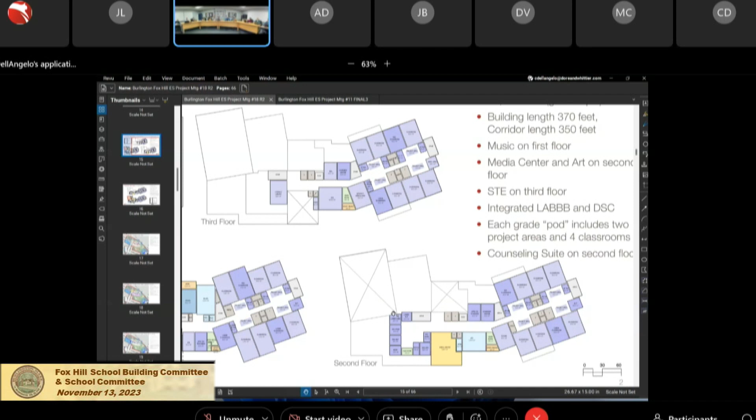And then you'll see the classroom wing or academic spaces, again 4 classrooms per grade. When you go up to the 3rd floor, it's primarily academic spaces. The science, tech, engineering classroom is up on the 3rd floor as it supports grades 3, 4, and 5. We have the counseling suite, whether it's guidance, adjustment counselors, psychologists, centrally located on the 2nd floor, so they have easy access to all 3 floors. So when we look at the 2nd floor plan...

So the 2-story option is very similarly laid out. The difference is that there are 3 grades per floor. So on the 1st floor, you'll enter, the cafeteria would be in front of you, the gymnasium slightly to the left or west of that. We have the cafeteria with the stage attached and the music classroom adjacent to that. And then you'd be entering the academic wing, and you'll see again, similarly, the 4 classroom pods per grade. We'd have kindergarten, first, second on the first floor, and then third, fourth, fifth on the second floor.

When you go up to the second floor, we again have the media center centrally and prominently located with the science, tech, engineering, and the art room. That's a great opportunity for shared resources and working collaboratively between the 2 spaces. The counseling suite would be on the second floor and have easy, direct access to the main administration down below.

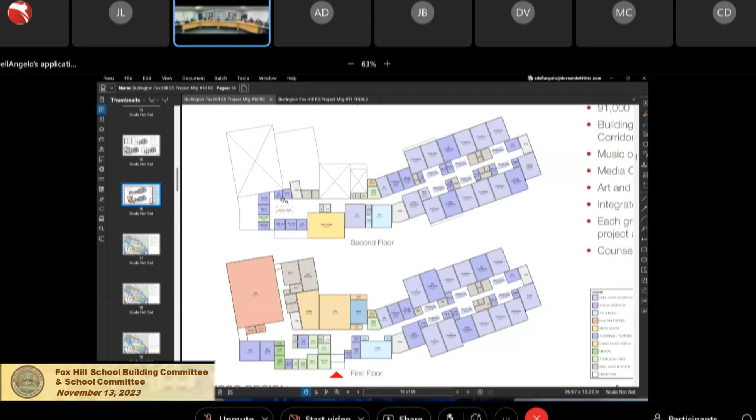I think that's it, if you want to. Yeah, I'm trying to see them.

Thanks, that's okay. So this footprint is slightly larger, it's 53,000 feet, and obviously the gross square footage is the same. The building length is slightly larger at 470 feet, with a corridor length again slightly larger. And then the music is on the first floor, the media is on the second, along with the art and the STE. The organization of the classrooms is exactly the same, with 4 classroom pods with special education programs or other support spaces to allow future flexibility as programs change.

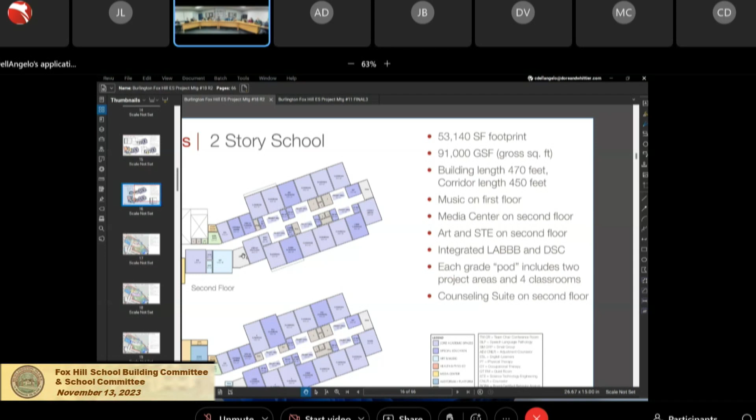So maybe we'll pause here, and if anyone has any questions regarding the organization of the plans as it relates to 2 or 3 story.

So I know we've talked a little bit about where, if we needed to put an addition on in the future, where would that go on the 2-story building, just for the sake of it. And then I know some people were talking about configuration, and if we did the 2-story, trying to make it not as long—is there any other way to lay things out, place things, so that it isn't as long? Like maybe putting the gym right behind the cafeteria, or doing something to rearrange things. But more importantly, just the first question, and then the other.

Thank you. So Christina, if you could just jump to some of the site plans. We have identified locations in all of the options. If you could zoom in, you'll see this is a 3-story option, but you'll see the dotted dash line at the end—depending on the final layout, final configuration, 2 classrooms at the end could be expanded. Do you see that dotted line? You could have 2 classrooms, so in a 3-story school you could get 6 additional classrooms, and in a 2-story school, 4 additional classrooms. This is where we currently are today, but once we have a final location, we can massage it and work on it to see if we can expand it further given the configuration of the location in the wetlands and constraints.

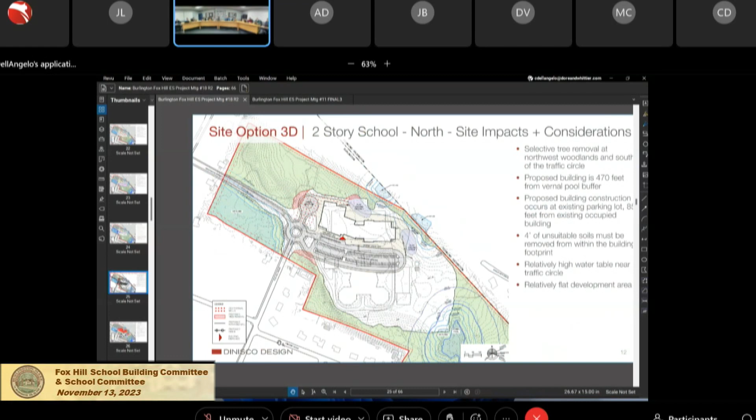Is that too far? I think that's too far. You gotta scroll up, sorry. Keep going. Is that too far? No, it's so hard to not be able to drive. Is this the two, this is the 3-story. All right, so come back down maybe. 29, thank you. I've got my cheat sheet here too. You got it, all right.

So as you can see, we'll continue to play with it, Catherine, how to break up the long mass, but we've already started to push and pull to break down the scale and keep the components—your academic wing you want to keep together. Then we have the core with the music and the cafeteria and then the gym. Each option has similar but different approaches, making sure we're able to get receiving into the building. We don't want them to have to drive all the way into the site or around the building to access it. But this will give you an idea that we're really trying to break down the scale, the massing, and make this a very interesting building as opposed to just a long linear building or approach.

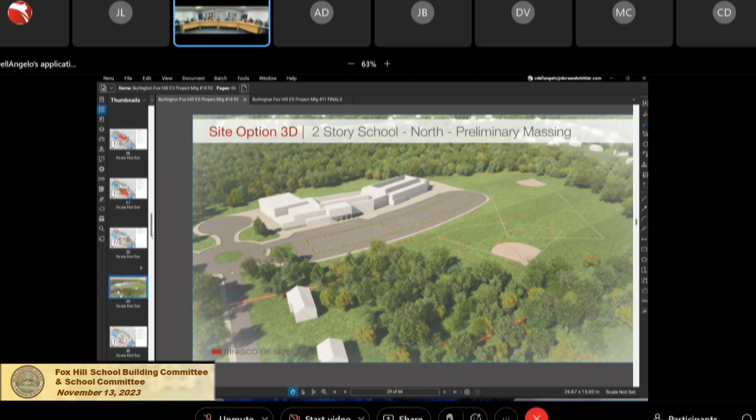And then if we look to the south, just to give you an example of what that might look like, we are slightly limited. This is the 3 stories, so keep going.

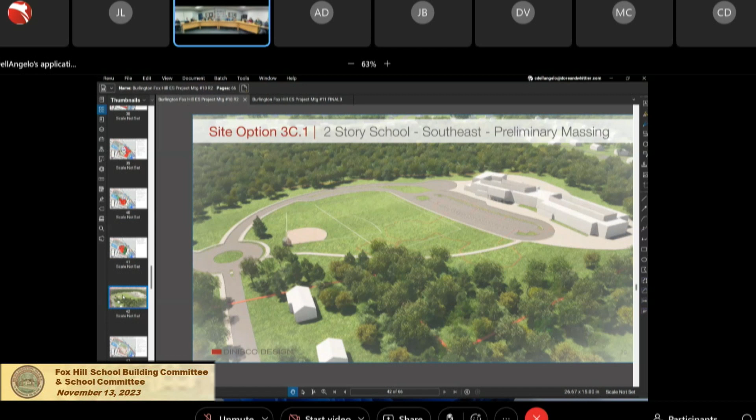There you go. So what slide is that? This is— thank you. Right, so if you want to scoot it over or zoom out just a little bit, yeah.

There you go. Yeah, this is the 3-story. So just so you could see, this is the 2-story—site option 3C, 2-story. We have several options of this, and we're thinking how we can locate the service, the gymnasium, the cafeteria, the drives, et cetera. So we'll continue, depending on what solution people like best, to try to make the building not feel so long and linear.

And we took this view for all of the options so it was the same view and everyone could see them. But clearly, unless you're flying a plane or have a drone, you would never be seeing the building from this view. But it just gives you an idea of the massing as it starts to take shape.

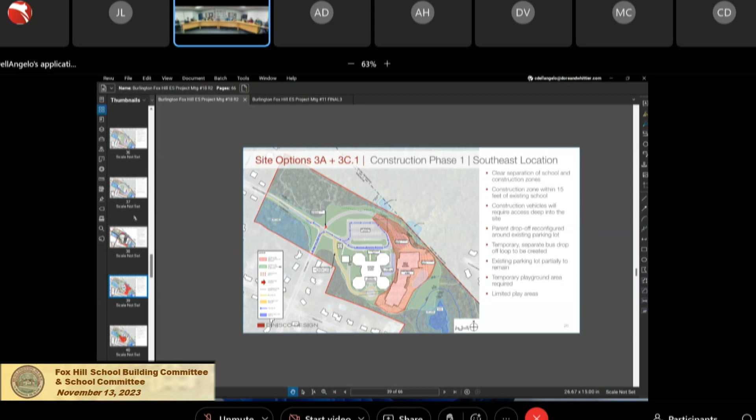And here too, if you would go up maybe 3, 4 slides, you can see where an addition would go if it was to the southeast. Oh yeah, yeah, keep going. Up or down? Up. Slide 30? Back slides, yeah. I'm trying to drive and view all at the same time. That's a 3-story, so it would be—could be even slide 22. That's what I'm on, yeah, right now.

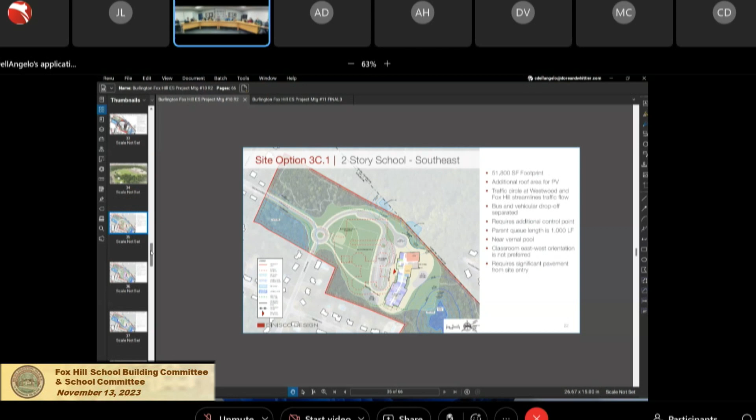Perfect, so if you zoom in—so we have a couple of options for the southeast. You can see we have the gym to the north and the classroom wing to the south. You could see that we can expand the classroom wing here. We're being mindful, we have some constraints, right? We have the vernal pool, the wetlands, the vernal pool buffer to the east, and then to the north we have another wetland, and we're trying to be as respectful as possible with a 100-foot setback there. And then you can see the dotted existing building. So we're somewhat squeezed or pinched as we have to locate the building in between these two constraints. But this is one way of looking at it, right?

With the gym to the north, the classrooms to the south, and then the next option, I think we flip the gym. The dotted line right here, that's for addition—that's the addition space, and that would be the same. Right now we've been able to identify 2 classrooms on the second floor and 2 classrooms on the first floor.

Yeah, if you want to just scroll down maybe, now I've got to look at it—everyone else is my eyes. I love it, thank you. We have the gym flipped in another version. So if you go to slide 32.

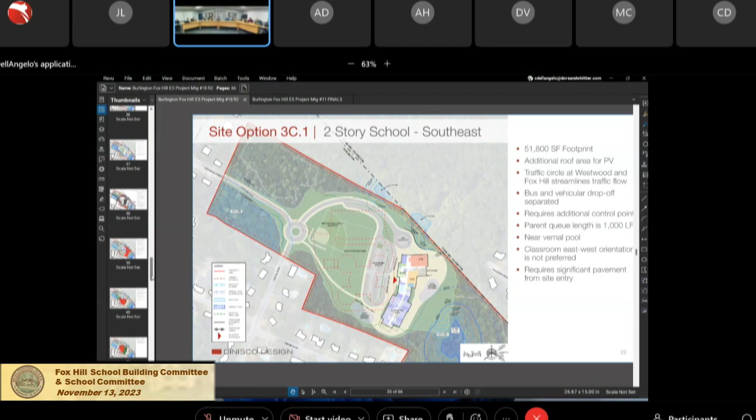Right, that's perfect. You'll see that this is again 2-story, and flipping the gym, you can see the building really starts to kink. We're able to make it a little more interesting and not feel as long or linear, but this is a tight site. With the existing constraints, especially the existing school, we start to become a little bit limited on how the building could be laid out in that location.

Now, with this version, can you flip it so the buses are on the opposite side? So if we flip the bus, you're saying put the buses to the north? Yes, up here, because I don't think anyone on Vincent's going to want buses idling in their backyard at 8 o'clock in the morning.

Agreed. So with that, why don't we walk through that? Christine, if you could go to the slide before that. We've come up with different schemes, and I think what we want to show is when we start thinking about the site relationships, all of the site requirements.

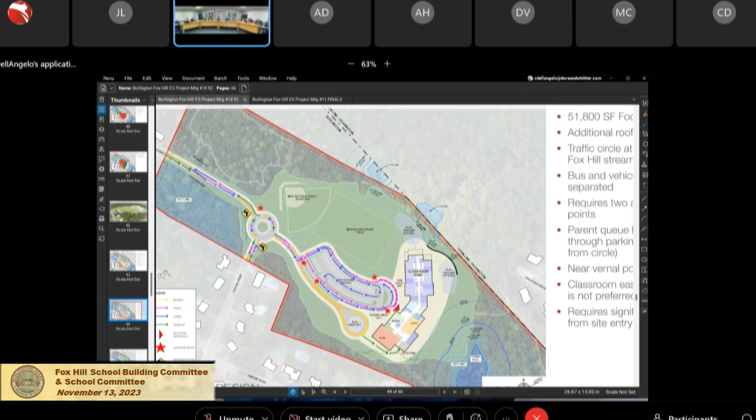If we flip the building so the gymnasium's to the north, then the bus loop would go to the north. I think we have that option - it wasn't shown, but we have one that has both the bus on the north and the parking. So what slide is that? 24. 24, 23, yep.

This is the same, right? You can see what we did here - there are different ways to configure the parking. We want to be thoughtful. We've started thinking about how we can do all of this with the existing building that has to remain, and what makes the most sense from a construction sequencing standpoint, so we're able to provide services, parking, and site amenities to the existing school while completing as much as we can in the first phase.

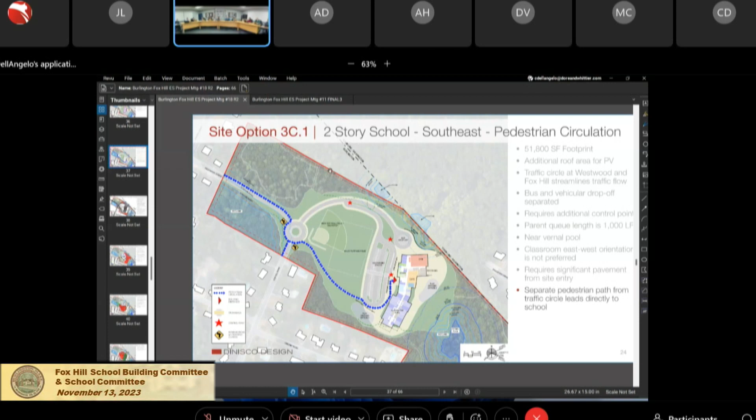Here it's very similar - we have the parking in the front, the parent drop-off loop in the front with the bus drop-off to the north, and flipping the building, we're able to have the receiving to the north, which would not occur during drop-off and pickup. They would come through the bus drop-off loop and enter the receiving kind of behind the gym. We'll continue to study this - does it make sense to have the receiving on the outside and the gym closer to the cafeteria? There's a lot of studies required as we go forward, but this responds to that.

What's a control point? Is that like a staffed location? Yeah. Okay, so we can spend a couple of minutes as we go through these options.

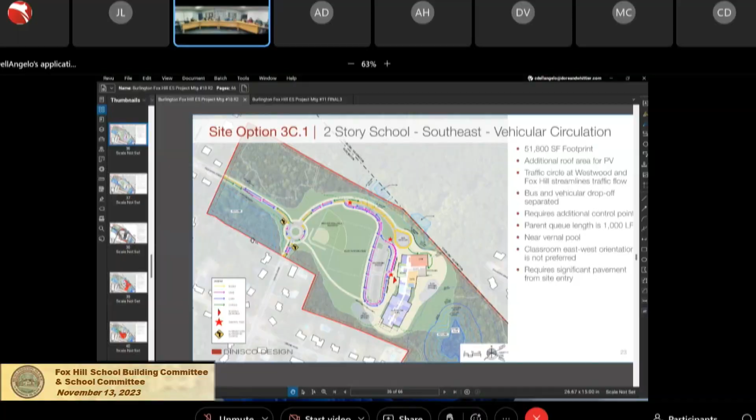I just want to make sure I'm looking at the same thing you are. Should we talk about stories separately than site? I think, because the story conversation is straightforward, and then we can talk about site after, instead of having to talk about 6 different things. We'll just talk about 2. Is there a question? I don't know. Oh, I was just responding to Catherine's point. I don't know if that answered it. There's opportunities. Thank you.

Do folks want to talk about the stories in and of itself? That way we can kind of narrow down the options a little bit. I think originally I was under the impression there was going to be a significant cost difference. Doesn't look like there's much of a cost difference between 2 and 3. So, any other comments?

Story-wise? Yeah, the cost difference. So also some other things. From a cost perspective, it's a little more. I think it's under $2 million cost difference, right, when you're looking at a 2-story. Oh wait, let me say it differently. It was not even, yeah. It was like a few, it's $100,000. Couple of hundred thousand. Sorry, there's so many cost slides here.

From an energy perspective, we did check in with our sustainability consultant. Slight difference, 1 to 2% more energy use with a 2-story versus 3-story. Conversely, you have more roof area that you can add more PVs to it, right? So it's pretty neutral in that respect. And then we can have the conversation about the classroom orientation separately. But yeah, so from an energy and cost, they're relatively neutral.

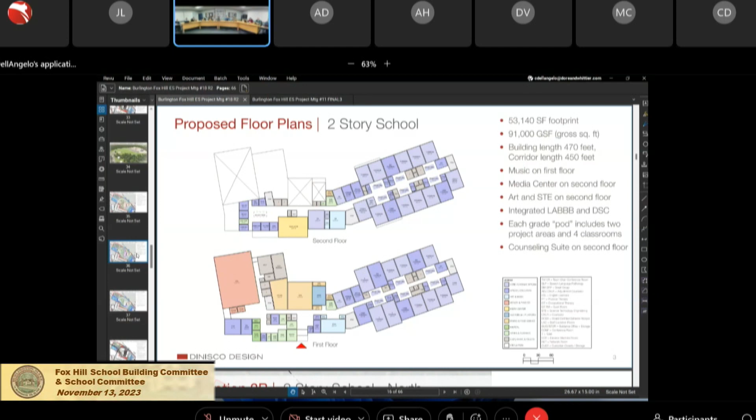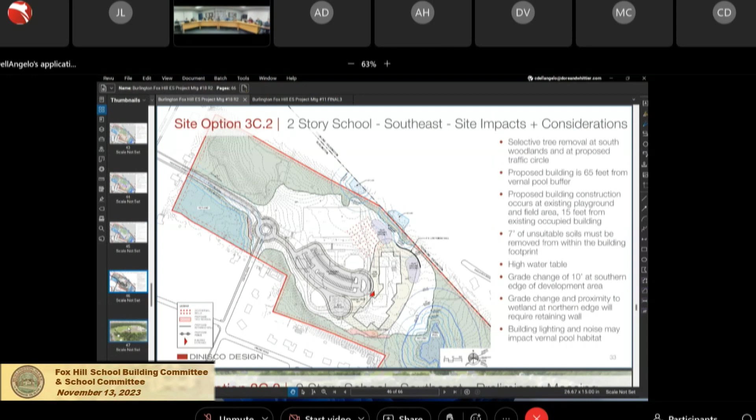Let me just get to my summary. C and D. If you go to slide 35, that might be helpful. Slide 35. Right, so if you go, yep, perfect. So C and D, so we have the north side options, 3 stories, 3B, 3D.

If we can just focus on 3D for right now, and then the southeast site options, if we just focus on C1 and 2. C is the south.

Is there like a high level difference between 1 and 2? One is... it's like just the gym at the top and they're parallel, right? Maybe we could have some nomenclature here so we're talking about the same thing. Zoom in, we can focus on them.

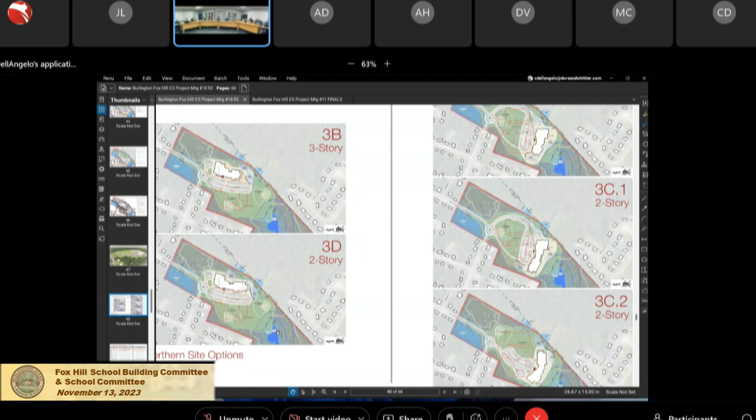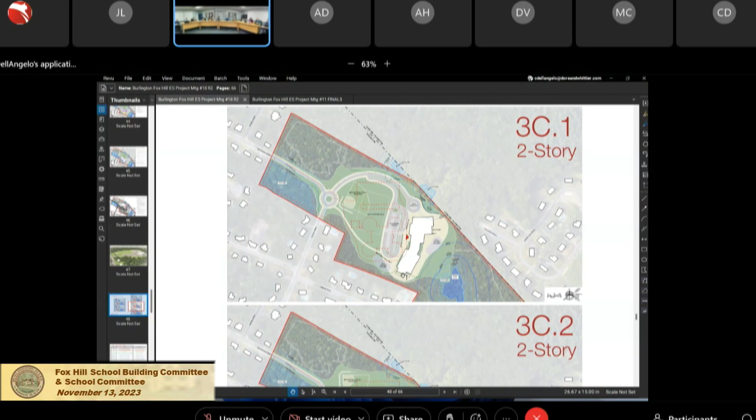So C1 has the gym at the top, right? And with the bus drop off to the north. Gym and bus to the top, okay. And then C2 has the building flipped, with the gym at the bottom, with the bus at the bottom.

And you'll see we're actually showing you two different ways to organize the driveway. There are pros and cons, and we'll get into why we put the drive perpendicular to the building on C2, versus perpendicular versus parallel to the building in C1. That was so we could get the queuing that we need into the site, since we need that extra queuing length.

But there are certainly many considerations and refinements that will be made. Even another example is we're showing fields here, and we don't have a final decision on what fields and how many. These fields came out of a preliminary conversation with the rec department, so we haven't gotten that far. We're just showing you what your options are, and how much it opens the site by removing the building that's in the center and being able to put a 2-story or 3-story building, tucking it at one end. It just opens up the site.

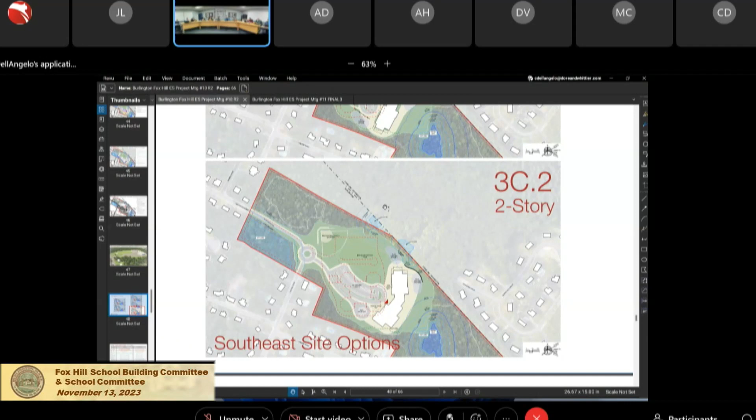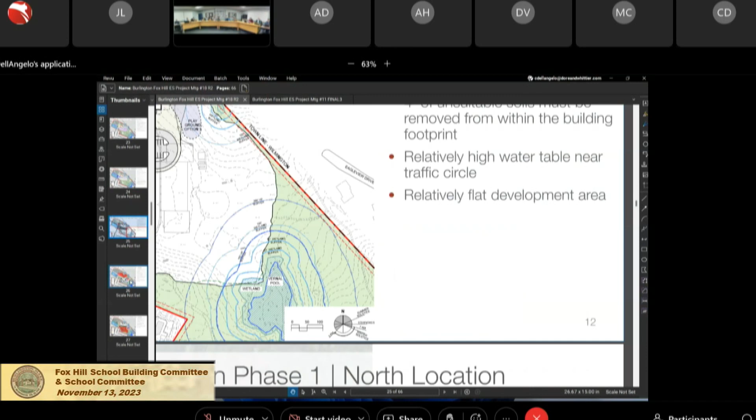So if we look at page 13. Good job, all right, yep, that's okay. So what we originally had is the building that was in the north location tucked up further into the site. And then we thought, we can make it work, preserve more trees, bring the building down, and construct it in a way that would not impede the existing operation of the school. So, Chris, to your point, the new school is going in the parking lot where the existing parking is.

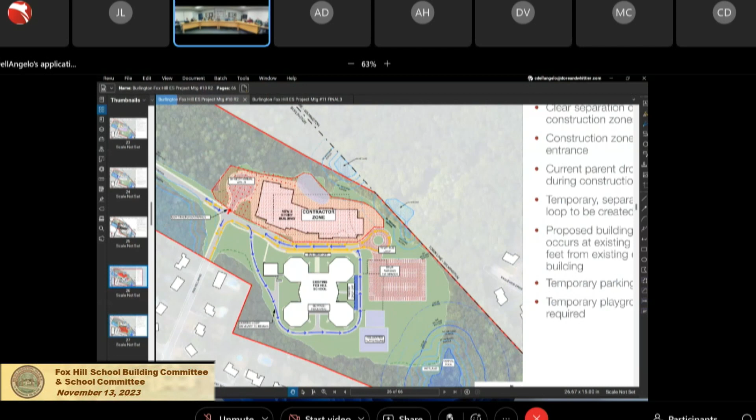So for the north option, if you zoom in a little bit, we do have different phasing plans. What's hashed or dotted in red would be the contractor area. If we put the building to the north of the existing building, it's pretty much going into the existing parking lot. We would create a temporary parking lot while the building is being constructed. We're able to take advantage of some of the existing roadway, add a drop-off loop for buses, and maintain the parent circulation as it currently does now. But to answer your question, yes, it is in the existing parking lot.

In the northern location, it would have to be pretty much in the parking lot, because that's where all the space is. We're trying to be mindful and not take down any trees. You can push it further into the site, but that means removal of more trees, and there's cost associated with that. But more importantly, there's such a beautiful area that we didn't want to start clearing trees when this could work.

But it is possible. Where that bus drop-off is, that involves clearing some trees, right? Yeah, there's a little bit. So let me find that slide here. Each option, let me just see. So that's a 3-story option, looking at geothermal wells. If you could go to slide 12, please.

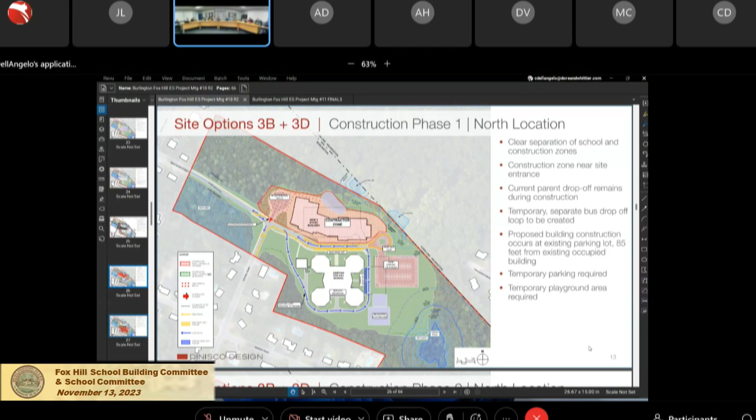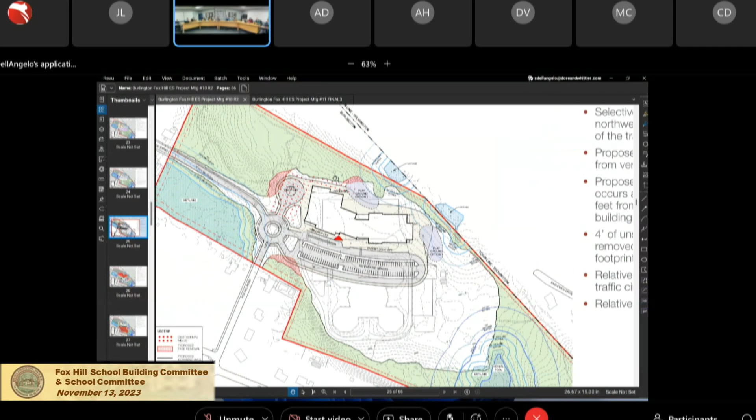So the red dots that you're seeing on slide 12, that's the geothermal wells. Those are underground. If you look at the red hatched areas, those are the areas of tree removal. It's very slight.

We wanted to be thoughtful about the location, preserving the beautiful site while making sure that we could coexist with construction and operations of the school.

So the rest of that question was basically, what's the story with the fields? Is that just something we came up with and we're really not sure about? So you mean why do we have so many fields shown, is that your question? And if we go ahead with a plan like one of these, who pays for the fields? Right, so if you could go to slide 9?

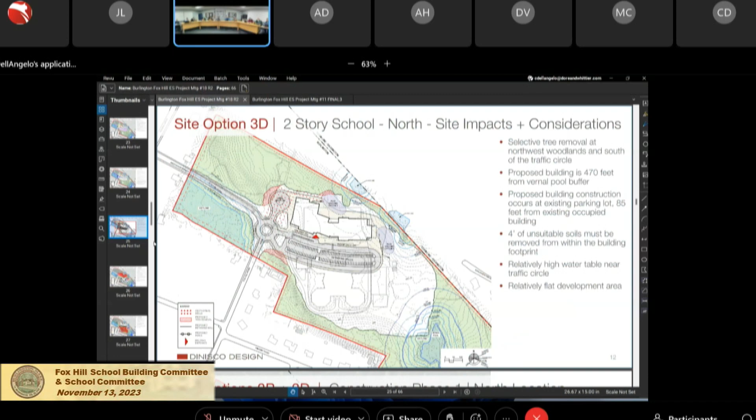Slide 9, right, that's the option about the 2-story. So our main goal, first and foremost, was making sure that we placed this construction, the new school, in an area that you could build while the existing school could remain, be respectful of the site, and limit the amount of tree removal required. But also recognizing this is a 50 or longer, 75-year investment, we don't want to 100% compromise for the 2 years of construction, but it obviously has to work for the longevity of your school.

So what we did was we laid this out. We made sure we had all the parking, the queuing. We have a dedicated van drop-off area, which would be separate from the parent drop-off area, which would be separate from the bus drop-off area. So we feel really good about the preliminary layout and organization of the circulation for the traffic.

Then you have the existing building. So once the new school is built, the existing building comes down. We finish the paving. We have some construction phasing sequencing, and so then we have this space left over.

And really this is two things. One is, again, we had a preliminary conversation with the rec department, and this was, hey, wouldn't this be nice? We haven't gotten any further. Are they going to pay for it? Right, so we haven't gotten to that.

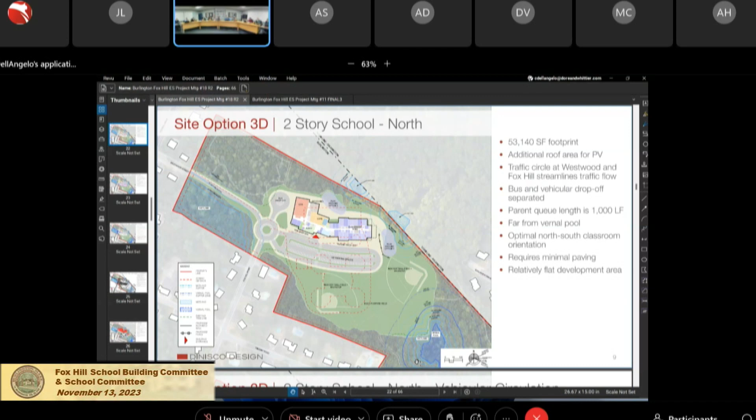So if we go to the next slide, and then maybe zoom in a little bit, it'll be easier for people to focus on that.

So what we've done here from a traffic perspective, maybe you can scoot over just a little bit, Christine, so people can see the legend. Yep, maybe up a little bit, so I can see the legend. I know, I'm very demanding.

So what we have here is, we've also thought through the traffic and circulation patterns. Again, this is just a start. We have a meeting with public safety on Friday to get their input on what we're missing, what else we should be thinking about as we lay this out. Is there a concern whether the buildings to the north or south have any thoughts about either one, which we feel is also equally important.

So what we have here is the traffic, which really applies for the most part to any of the options. You'll see the vans are in purple and magenta, the cars are in blue, and the buses are in yellow, with some green interspersed for service. We have enough space that we could queue both the vans and the parent drop-off area. Parents would drop off in the front right before the entry because we know that's where they're going to stop regardless, and then the vans could come in.

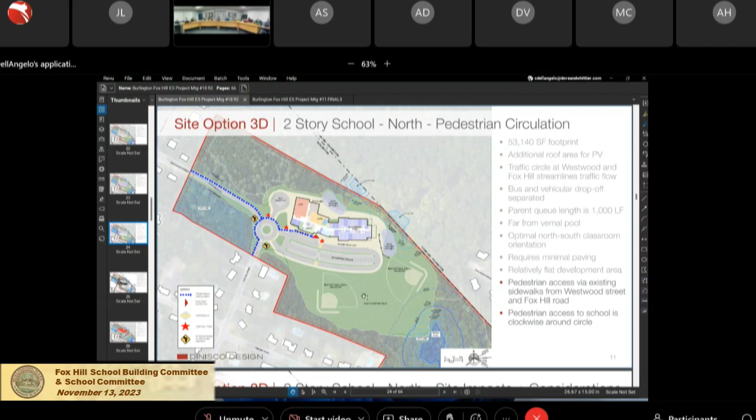If you go to the next slide, here you go, it talks about pedestrian circulation. So because we really only need one, we were suggesting maybe another one. We don't want students to think they could just go right when there are cars coming. So this does need to be fleshed out a lot more, but our initial thoughts are this seems to make sense with 2 to 3 control points, which is not uncommon with school buildings.

But this really separates all of the activities quite well and provides sufficient queuing for the parents coming onto site.

And then the next slide, we started looking at the site impacts if the building was to the north of the existing school. The hatched red areas are for tree removal as we understand it today. The red dots are our ground source heat pump, or geothermal wells, which would work very well here. You want the geothermal wells to be near the receiving and mechanical spaces, so thinking about the relationships, not just programmatically but also for building use, is important.

We would also have the receiving area and trash and dumpsters, etc., kind of by the bus drop-off area as well, so that those services are not entering the site all the way in. That's why we were locating them there.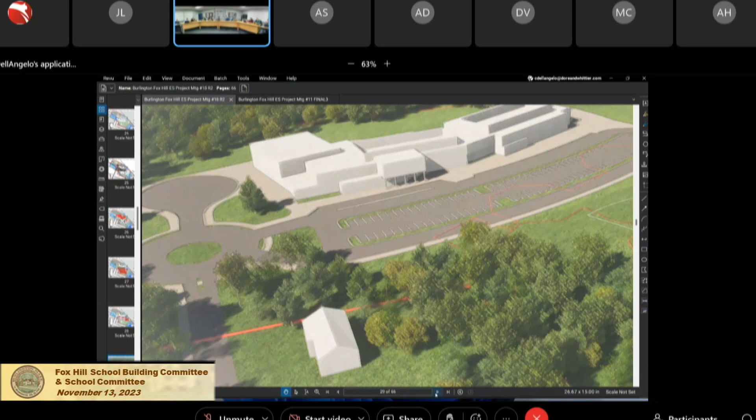And then the last phase would be that we organize this in such a way that now everyone's in, and we would complete the site work and then turn it over to the school. And then the last slide just gives you an idea of, if you want to zoom out a little bit, there you go, right? So again, it really opens up the site.

What we need to do is actually show an aerial view of what it currently looks like compared to what it is. And again, it does not have to be play fields. You can embrace the site for its natural beauty, for outdoor learning opportunities, for whatever it is that you would like. This really just represents the vastness of the open space that you'll benefit from. And then, did you want to add?

Yep. So actually, before we move on, I wanted to talk a little bit about how we site the building and how we start the process. When we look at how the spaces are organized together, we also look at how the classrooms are oriented, and I think Donna had mentioned the north-south orientation, which is really ideal for classroom orientation because it allows you to have windows in such a way that it minimizes glare. So on the north side, when you have classrooms on the north side, there is no direct sunlight that you need to control, so shades can be open almost all day long.

And that really helps with energy consumption because, on nice days, you don't need to turn on that many lights. And then on the south side, we can control the sunlight a little bit better because during many of the seasons, the sun is at a high angle, and we can use overhangs or solar shades in such a way that it, again, doesn't require the use of shade. So locating the school on the north side of the site does allow that north-south orientation, which is not possible on the other location. So we just wanted to point out some big differences between the two siting options.

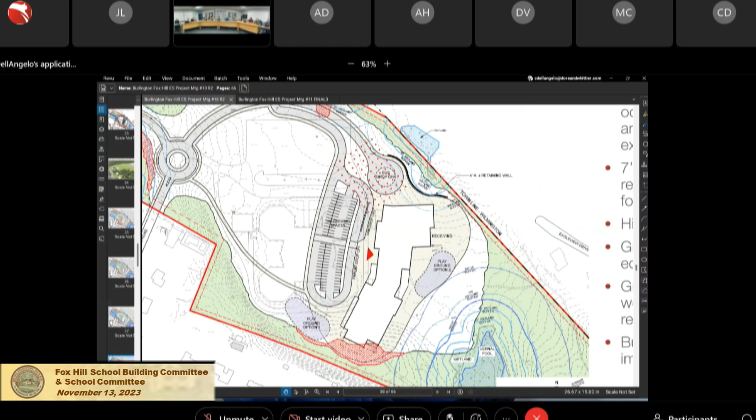Actually, just zoom in, that would be great. Yes, thank you. So the grade drop there averages from 4 feet to 12 feet. So there's going to be a pretty good size retaining wall there that will provide railing so it has some safety features so kids can't run off and jump off the side.

And then as you move to the south, close to the Vincent Street neighborhood, we do need to remove a good amount of trees, and there's a knoll that we'll need to flatten out to grade that area to provide driveway access around the south side of the school. Right now we're not showing a wall there, but it may be that we might need a little bit of a wall right next to the vernal pool. Because we're building next to the vernal pool buffer zone, there are many things we have to consider—runoff is one, groundwater is another.

The noise factor during construction—there's 2 years of construction. We're outside the 200-foot buffer, but we don't know how that's going to impact the wildlife habitat.

There's also lights on the building. There are no lights on the fields, but there will be lights on the building required for security purposes. We typically mount cameras on the outside of buildings, and cameras usually need lights so they can actually record. We typically place these lights on motion sensors, so if nothing runs across the field, the lights won't go on. But if there's a deer or wildlife, the lights might go on and off.

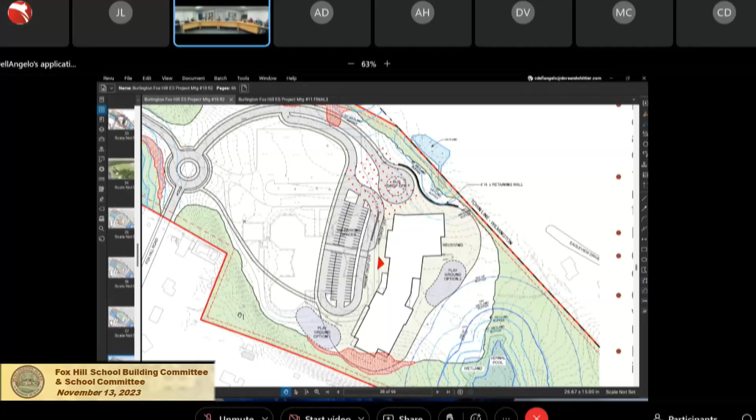On this one slide, you noted the temporary playground required limited play areas. Can you speak to the construction phasing, which would be more impactful? If you go to the next slide—overall, which one would be more impactful to the students? I think it depends on how you look at it and approach it.

How we've been thinking through the construction phasing for the building to the south of the existing building—as you can see, we're maintaining our footprint and even the paved area for public safety access around the building, outside of the 200-foot vernal pool buffer. But we can't push it too much further west or northwest because we're really encroaching on the existing building.

So as we started looking at this, we thought: okay, if we put the building here, we're going to have a construction fence around it. What does that mean? We can maintain the existing parking lot that's currently there, which is great. What that does mean, though, is that we're recommending a temporary bus drop-off loop that will bring buses to the rear of the existing building while we have parents queuing through the existing parking lot. Then we would need a temporary playground or something created right there.

We'll talk a little more about this, but early site packages are certainly possible, so we can start doing some of this work in advance of the full contractor coming on site. We've already started thinking about how to prime and prep the site while school's not in session, so we can hit the ground running. So this would create the road that comes in. If you go to the next slide.

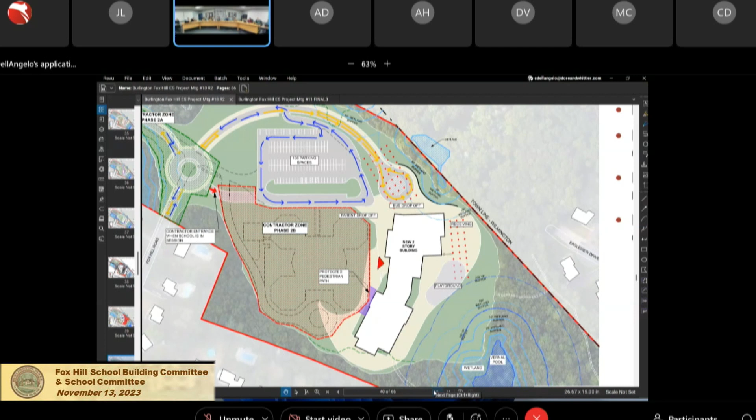And if you go to the next slide, again very similar, we would keep the parking lot that's currently there. We definitely would need a lot of control points as we look at how to navigate buses and cars for the temporary phase 2 as we demolish the existing building. But then when we're finished and move the students into the new school, the second phase would be to finish the fields afterwards, or the site, I shouldn't say fields.

Can I ask a quick question? The traffic circle that's being proposed, is that part of the school building project, or is that going to be considered a municipal project? It's part of this project. Okay, thank you.

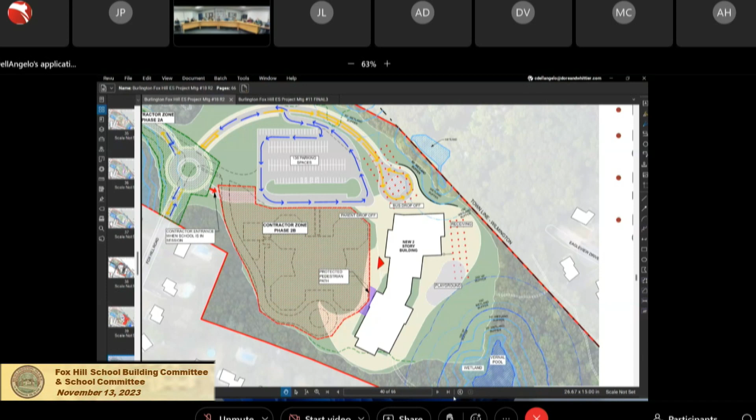And then if we go to the next slide, it will just show you the current thinking of the massing.

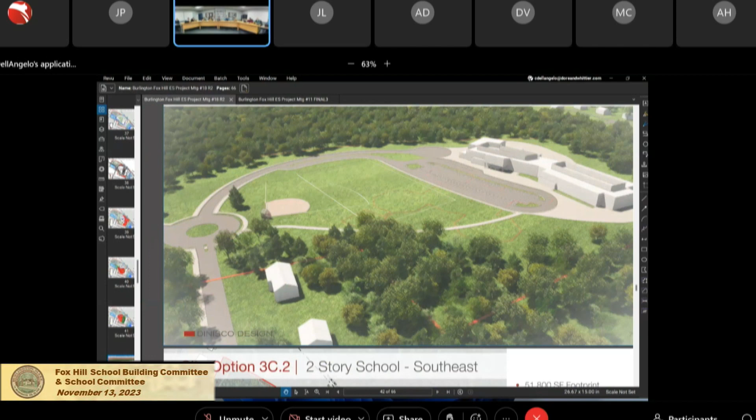And then we can go through the same exercise conversation of flipping the parking and the building, so everything's to the south of the site. We had the same reservations, I think, as Catherine mentioned, just showing the options that are available. This does kink the building a little bit more - we're able to kink it and not make it feel so long or linear, but we think there's still other ways that we can do it with the drive and the buses to the north of the site as well.

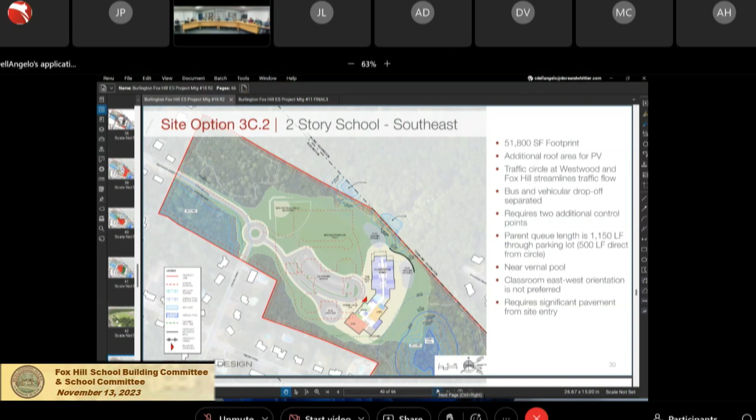And we didn't go through the whole phasing, but all of the attributes remain the same. If you want to just flip through that, Christina. Yep, you can just keep going.

Very similar layouts, control points, pedestrian separated from bus, separated from car, separated from van. You're so fortunate that this is easy for us to come up with solutions because you have the space. And the fields, quote unquote, or lines that we've been drawing were initial conversations, but also just give you a sense of scale of how much more open space you'll actually have once your new building is complete. It's just great, and you can take advantage of your beautiful site.

So we can talk about where the playground goes as opposed to maybe the paved area for recess before or after lunch. There's so many opportunities here and decisions to be made as we move forward. Yeah, we're pretty excited.

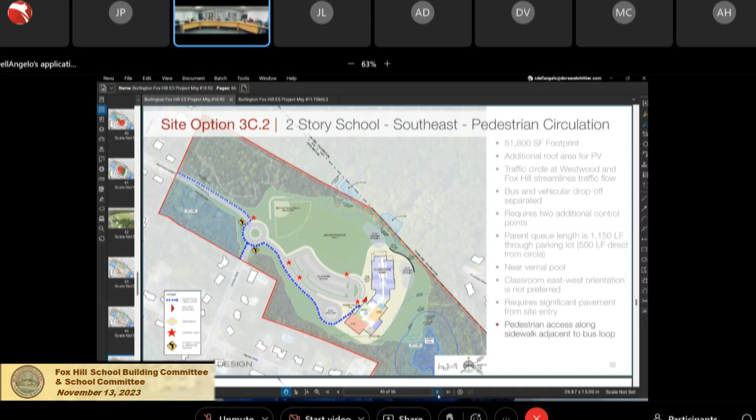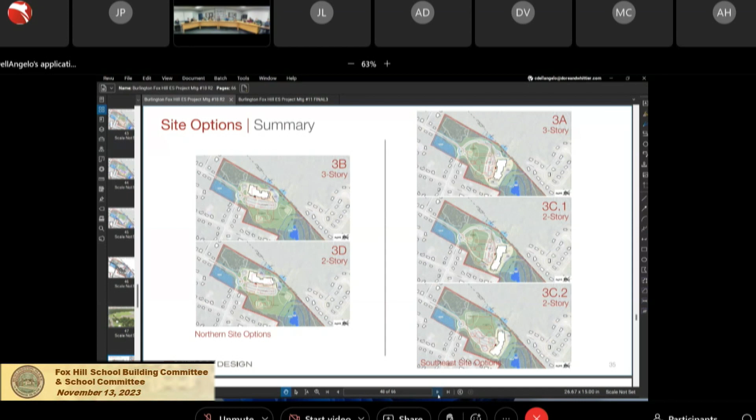Keep going. And so here we are. So I think what we're hearing is next week - any feedback you have for this week, we can modify, we can tweak. We'll have a conversation next week, but we'll focus on 3D and then 3C, 1 and 2.

And then just to give you an update on where we are. Oh, sure, I'm sorry. Yes. Oh, Martha, go ahead. Okay, yeah, when I looked at the presentation in advance, I focused on the page for each of the options - it said site impacts and considerations, and I just want to refer back to that now.

So if we look at the north two-story school, I saw a lot of positives. The footprint is what it is. The additional roof area for the PV is, I think, a positive. It is far from the vernal pool, and I know there's been concern about protecting the vernal pool. The optimal north-south classroom orientation, which Vivian mentioned, and it requires minimal paving.

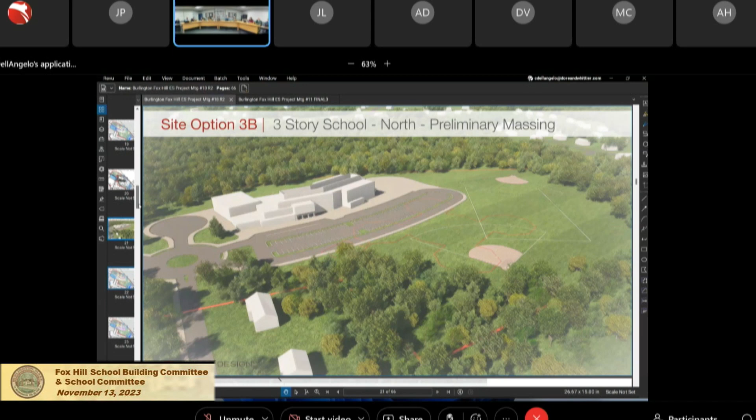So we haven't talked much about that, but impervious surface is what environmentalists call pavement, and it means the water doesn't go through it, and typically the goal of making things more environmentally friendly is to have less impervious surface. So I think that's a factor we need to consider - it's quite a bit more impervious surface. I've even had community members say, what about putting in a parking garage so we have less impervious surface, because a two-story parking garage would take up half as much room.

I don't know that that's in the purview of this project, but I think it's an important factor. And the last thing here is relatively flat development area, so again there's less digging and grading and retention walls and those kinds of things. If we then look at the two-story school - oh, wait a minute.

Under site impacts, it seems there's less tree removal, and it's a large property. Which one are you? This is site option 3D, two-story, page 12. Thank you, that work? Yep, page 12, okay.

So if you look at the bullets on the right, it's my understanding there's less tree removal with this option. Some people love trees, as everybody who knows my history knows. I do think that if we need to take down trees to build this project, there are plenty of trees, and we can even put some trees onto the site, as was mentioned by the landscape person. But there is less tree removal in this option.

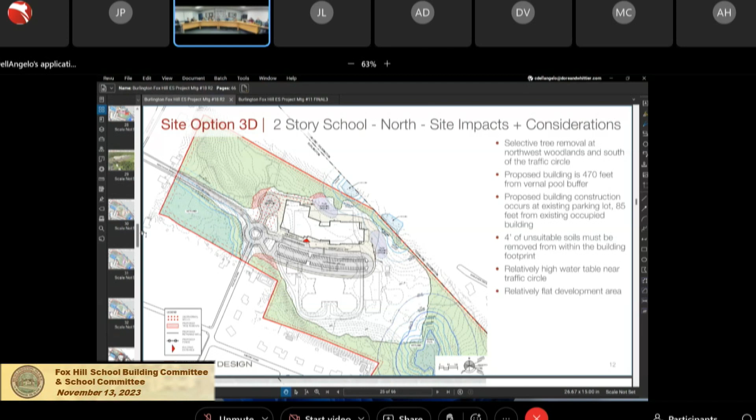And if we go to slide 25, I guess it does have a little more tree removal. The grade change will require more digging and building retaining walls. And by putting the building 65 feet from the vernal pool, as Vivian mentioned, we have a building that is going to be in use.

It's going to be in use a lot of the time, with a lot of people activity. I did listen to the Conservation Commission meeting on a recording, since I was unable to attend it last week. I heard repeated a number of times that one of the big concerns is not having so many people there. I don't quite understand, but somehow they decided having fields would put more people near the vernal pool. I don't see how fields used during daylight hours would put more people near the vernal pools than a school operating full-time during the school year and part-time over the summer.

They also mentioned, and you all got a letter from the Conservation Commission with concerns, that if the building was put there, we could put in native plantings — but there's absolutely no reason we couldn't put native plantings there if there were fields instead. So native plantings could support the natural resource area, and could also serve as a buffer for loose balls. I'd be happy to have us say we need to put in a fence to catch loose balls.

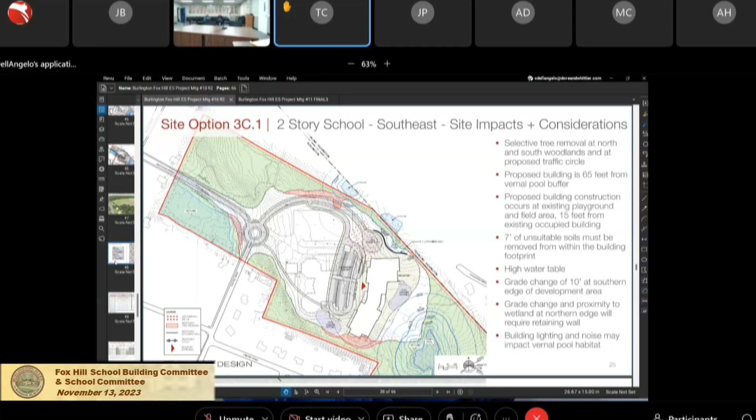Tara. Hi, I just wanted to quickly comment about the location with the two choices. After talking with some staff members after these plans came out, there were concerns around the southeast site and having the fields at the front of the school, and how close that is to the road, and how far away students would be from the teachers and the playground. The way the fields are, we currently have kids in the woods all the time and have to go get them out, so they will definitely wander towards the street. There was a lot of concern about the fields being right out in the open there with Westwood and Fox Hill Street. I just wanted to put that in.

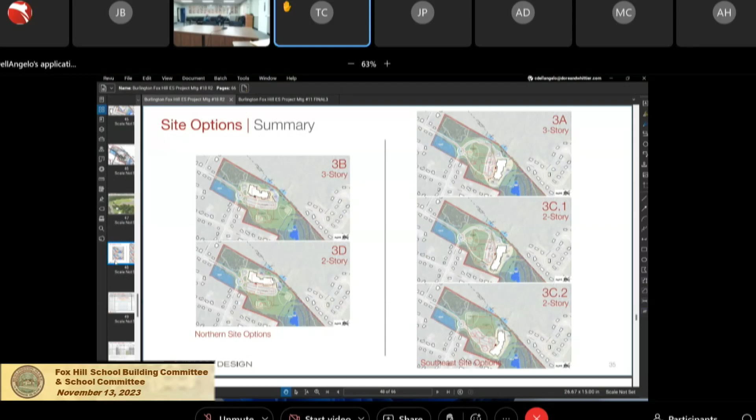I have the same concern. So what do they say, for the north, I think is what you're saying? Prefer the north. I think we lost her. Yes. Yeah.

All right, yes please. Tonight was just discussion. Yeah, no, this has been great.

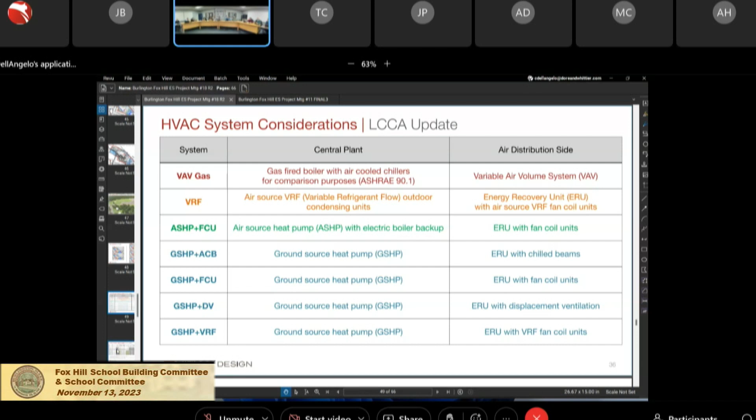So we had our sustainability consultants run the analysis, and if you go to the next slide, the report will be forthcoming, but the results will tell you—the first column is what your energy use index, or intensity, is. This is really important because it's what we want to focus on as we think about how we can make this building net zero.

Our goal is net zero ready, right? Our goal is to always have it be 25 or less, and with Mass Save, they're saying anything under 25.5 or 25.4 would qualify for net zero ready status or to take advantage of their program.

So the EUI is the first column, and then we've had our cost estimates completed, so we know the first cost, which is your construction cost—what it costs to actually construct these systems. We then added in what the Mass Save incentives are for each of the systems. We can go into the next slide in a minute, but suffice to say everyone is really excited about the opportunities of utilizing ground source heat pumps.

Mass Save has very large incentives, as you'll see—$1.3 million if we utilize ground source heat pumps and have our EUI under 25. So that's a really nice rebate you would receive.

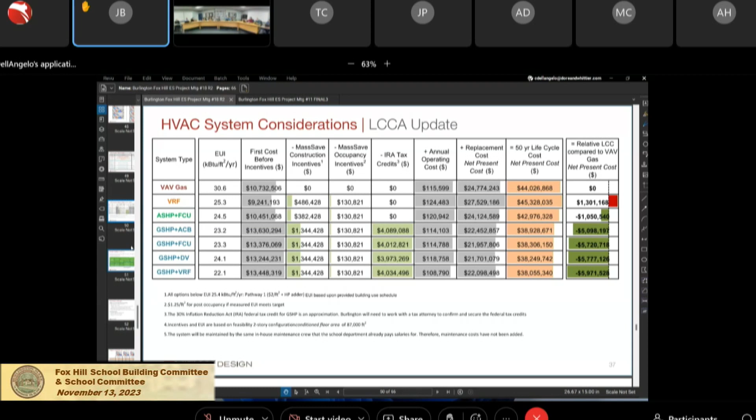That was partially garbled—I think what you asked, Jeremy, was what's the lifespan, or how long are the IRA tax credits going to remain. Understood. It's our understanding that everyone is projecting those are here to stay. I don't know if someone will come back and remove that from law, but...

That's my question, I just wanted to know your level of confidence with it. That's all. Yeah, everyone is—this is somewhat new to us, but there are many tax attorneys and tax accountants who are really focused and have dived deep into this, and everyone from what we're hearing is saying these tax credits should be here to stay.

We've shown this before, and this really just shows you, based on the energy use of the building and the schedules we've received, that we can hit the Path 1, Tier 1 for EUI, which is wonderful. So you can take advantage, whether it's the VRF system at $1,200 a ton rebate or ground source heat pump at $4,500 a ton, which was reflected in the slide before.

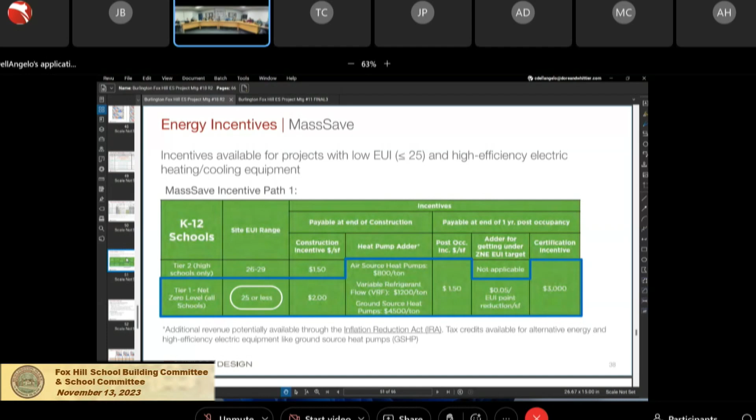We're really happy to report—I don't know if everyone took a peek and went straight to the bottom, but the costs really came in favorable, and we're really pleased with it. The PDP was really just very preliminary design, reflected in cost per square foot.

We didn't have a lot of information, so once we narrowed it down and were able to hone in on option 3, this really allowed us to focus and understand the site constraints and what was required of the building to achieve all of the options we've presented to you tonight. This is still preliminary, and much more work needs to go into it, but we're feeling really good about the results of the cost estimate.

We had two cost estimators, two independent third-party cost estimators, one from Danisco, one from Dore and Whittier. They were less than 0.5% apart—it was really great, and they both got the scope. So we're really happy with the results.

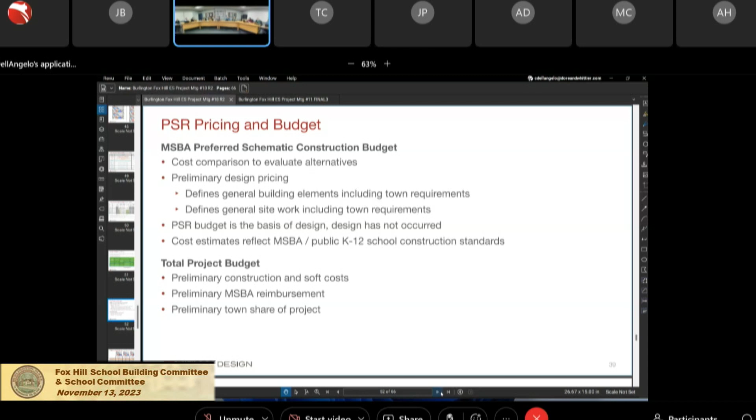So, yep, that would be great. You're gonna—yeah, I can walk through this. Thank you.

This first slide takes a look at the construction costs. It starts with 3A and 3B on the left, which are both 3-story models, and then 3C and 3D, which are 2-story models. We're going to talk a little more about the contracting method, whether it's design-bid-build or CM at risk, in a moment. But first let me list what's on the left side of the page. Total construction baseline is a VAV, gas-fired boiler.

The next line is the adder that Donna just went through to switch to a ground source heat pump and fan coil units. That gets you to the total construction cost, looking at option 3A in the CMR column as an example, that gets you to around 83 million. Then when you take out those incentives and rebates, that's the 5.4, which gets you to the bottom line construction cost. I'll pause here to see if anybody has questions on this sheet.

So in the second white row, you added for the ground source heat pumps and FCU - was that because FCU is kind of in the middle, so you were using it as a median to give us an idea? Is that why we don't have a list of every single option? Is that what your thinking was? Correct. Great, thank you.

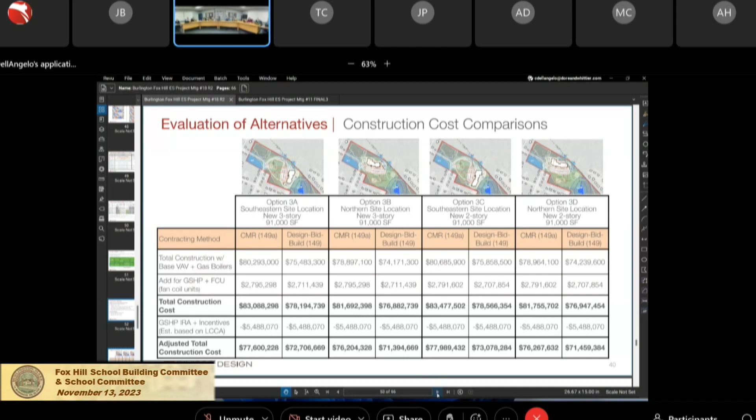I just wanted to raise that one of the things not represented here is the potential to use the project to include PV electric generation. So if people get attached to these numbers, there may still be some value add that we might want, that comes in later in the project.

Yeah, absolutely correct. There's still several decisions left to be made that could impact these numbers, so it was important for people to know that this is sort of a snapshot in time of what was on the drawings that our estimators looked at.

I'd like to add, though, that the infrastructure for PV is included. So although the PV itself is not included - the actual photovoltaics, the canopies on the roof - those aren't included, if you do a PPA, the building will be designed so that it's just plug it in. I don't know if we have conduit in the parking lot to support electric vehicles, but we can add that as well. We typically will do that.

This next slide looks at overall project costs, similar to what you just saw on the previous slide. Starting with the left-hand column, working my way down, looking at the 3A CMR option as an example, we have the total construction with ground source heat pump and fan coil units, which we saw on the previous page. Then we've put in a multiplier for soft costs, some of which are listed at the bottom of the page in bulleted items - essentially the project team and anything that isn't in the building - which gets you to the subtotal of project costs, in this example 104.941. Then there's the same reduction for incentives and rebates to get you a total project cost.

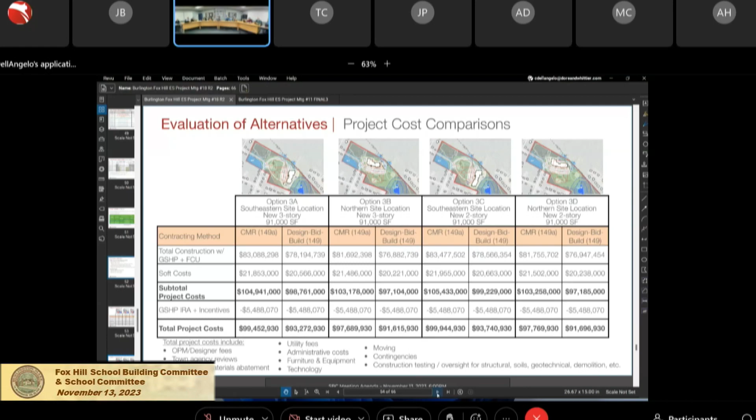I have one. What was the increase that MSBA agreed to?

The construction cap for the building used to be $393 per square foot. It's now $550 per square foot. And respectively, site work also increased from $39 per square foot to $55 per square foot.

So you're getting more money from the state, and that coupled with some of these incentives and rebates, which I think you all know is just recently now allowed by MSBA—they used to say if you get extra money, we're going to take it off our grant. So that policy is now gone. So two very good things for this particular project.

That's great. So as I said, we'll make that available. We can send it out to the committee showing the district share, and you can also have access to the 3011 budget sheet. Feel free to take a look and let us know if you have any questions.

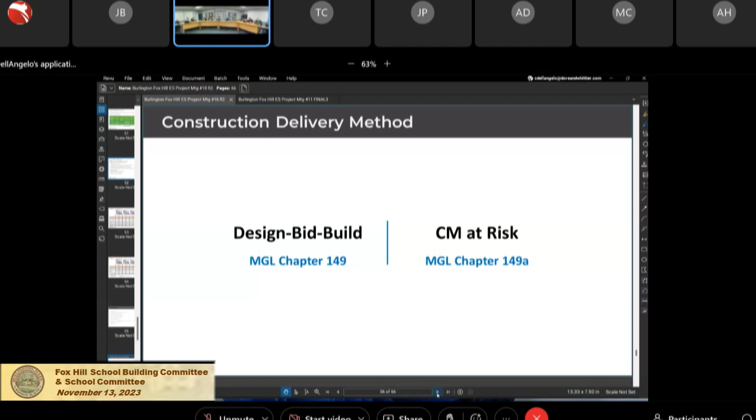Okay, so we're getting a little long here. We did have a presentation—hopefully some of you have had a chance to take a look at it. I'm just going to hit it quickly, but before I get into it, I want to share that Danisco and Dore and Whittier got together. If you go to the next slide, this talks about some considerations that are important as it relates to making this choice.

For some districts, budget is obviously a top concern. If every penny counts, people understand that CM at risk comes with a premium, and as you saw on that previous slide, it's in the $4 to $5-ish million range, so that's one major consideration.

Sort of the design itself—is it complex? The schedule, do we need to utilize early release packages based on the time of year that our drawings get done? A risk assessment—if it's a phased occupied renovation, that level of complexity lends itself more to CM at risk than design bid build.

And then owner's expertise—what's the town used to? I believe you've done both methods in this town, so I don't know that there's a preference or ease, but those are some of the things we think about as it relates to the project and being able to make a recommendation to the committee on which way to go.

I'm going to sum it up pretty quickly, and then I can flip through the slides if you like. As a team, we got together and challenged ourselves to come up with a $4 to $5 million reason why it would make sense to go CM at risk, and we can't.

The site is fairly big compared to some of the other ones we've seen, so I think design bid build will be fine. On schedule, there's no pro in terms of being able to issue an early release package just because of the time of year our drawings are finishing, so we don't see that as an advantage. Those are the two main reasons. We don't think we would recommend CM at risk, so ultimately we're going to recommend design bid build, save the money.

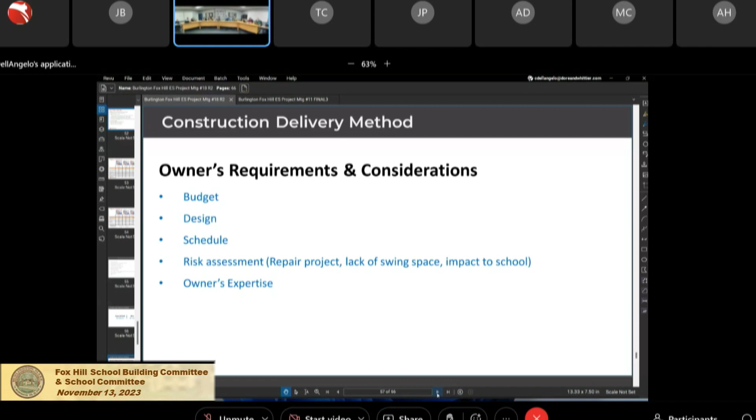Click down—there's a bunch of slides we provided that just show facts and advantages. I'm just going to leave this one up on the screen for a moment and see if anybody has any questions.

In general, the big picture difference is with design bid build, you go 100% through design and then you bid it. With CM at risk, you get to about 50%, which is our schematic design, and they come on board at that phase. The thought behind that is you're going to have to pay them money. We usually specify an amount for the CMs, and we haven't had anyone push back on that, anywhere in the $30,000 to $50,000 range.

They come on board and do constructability reviews, looking at the drawings as they progress. Instead of the OPM, they provide a schematic design estimate. They also weigh in on phasing and logistics. So that's the big picture difference between the two, and again, we just don't see the need for it here.

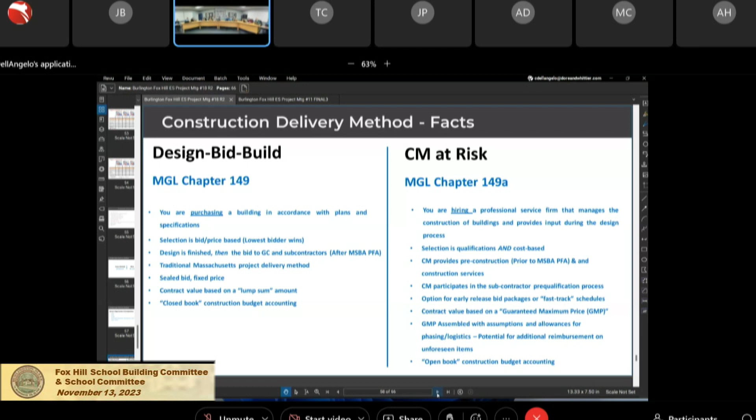Mike, my question—my understanding is, and it says right here, the CM would assume the risk for project cost. Now, in this kind of still slightly unprecedented area, do we see that as an advantage, or is it moving? I mean, this is expensive. I didn't really know.

So when you have a CM, you typically build a guaranteed maximum price, a GMP. What's in a GMP is the designer has issued some documents, the CM has been looking at them, attending meetings with us, and going through this level of coordination. They identify things like, I don't think they drew this retaining wall quite right, so I'm going to have a hold for $100,000 in addition to that. They're identifying risks and plugging money into the GMP, so you're going to pay for it either way.

Danisco's drawings are pretty tight, and in terms of change orders, it's very low percentage-wise—I'd expect 1% to 2% at the worst. Knowing you have a good designer and a good team looking at phasing and logistics now, we're struggling to figure out why we'd spend $5 million more—it ranges 4, 5, and 6. So it's not insignificant money. Most of the jobs I do are CM at risk, but they're also pretty complex jobs. I'm not diminishing that this is a complex project, but we just don't see the need.